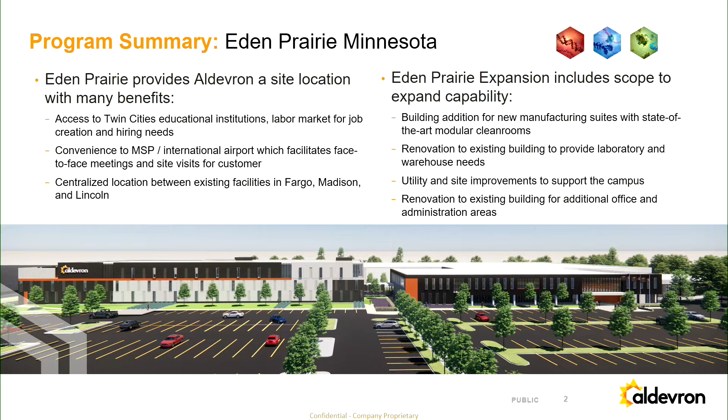With that, I will hand off to our architect, Jackie Peck, BWBR, St. Paul. I am Jackie Peck with BWBR, architect and project manager for this site.

So 7075 Flying Cloud Drive, as you mentioned, is the Blue Stem SuperValu building. It has been vacant for a couple years, so we're excited to get in there and start developing this property. It's an existing 345,000 square foot building, 2 stories, on a property that is zoned I2. The use of the building that we're proposing does meet the criteria of the I2 zone.

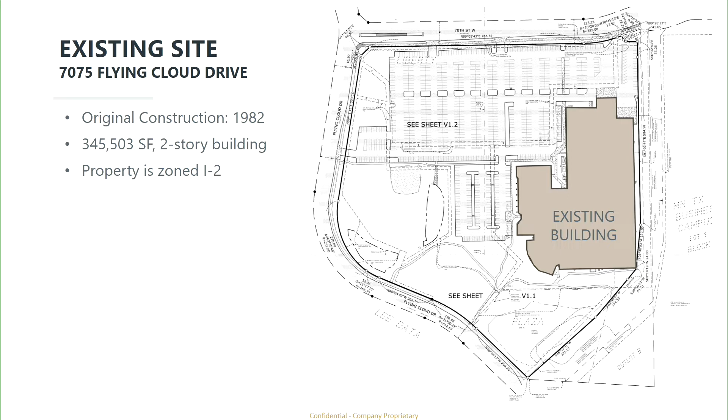As mentioned, we are proposing a 96,000 square foot addition to this building. It would be 2 stories and located in an impervious part of the site. There are minimal trees—it's mostly concrete and asphalt area where we're proposing this addition. The offset of any trees that we would be disturbing would be replaced in kind.

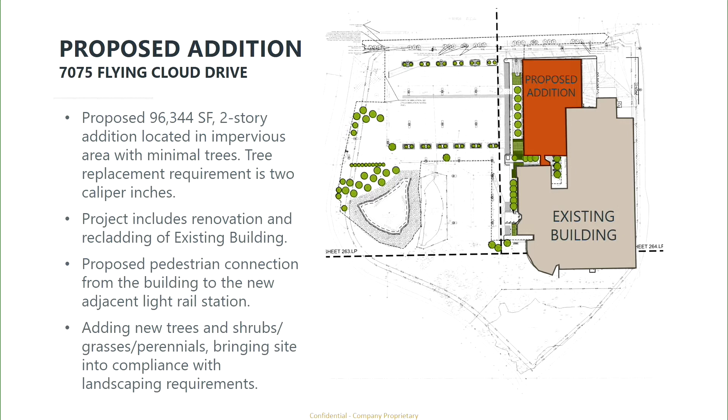With the addition, we would also be doing a renovation for portions of the existing building. Knowing that we have the Golden Triangle Station right at the corner, we have a pedestrian connection that we are planning to connect over there for staff to use. Otherwise, a few of the sustainability features we are planning to incorporate include EV charging stations, as well as low VOC materials, upgraded light fixtures, and LED dimming controls—trying to be energy efficient with everything new going into the building.

And then flying around to the back side, this is along the light rail. This is the existing precast building that we would be repainting in the branded colors.

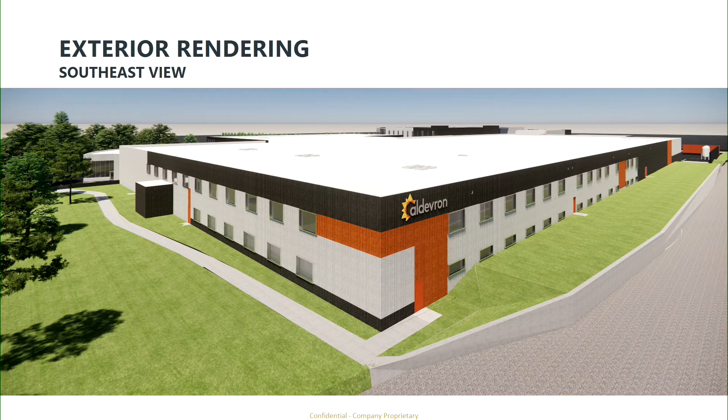There are 4 waivers that we are requesting with this project. The first one being parking. Per the city code, with the use moving into the building, we have 748 parking stalls required. We are providing 669 parking stalls, so we are requesting a waiver of a deficit of 79 parking stalls. With the traffic counts and anticipated employee counts for this building, we feel that the 669 parking stalls will accommodate those employees.

We're asking for a building height waiver. Maximum height in I-2 is 40 feet, and we are requesting 42 feet for the west facade only.

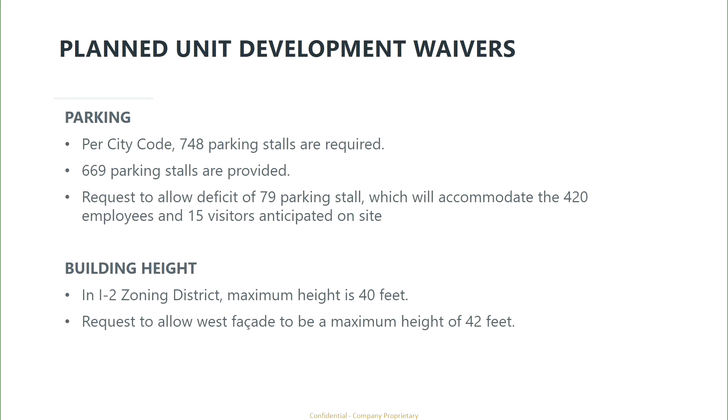We have a shoreland waiver. The city code requires 30% impervious surface area. The existing building is actually at 64.2%. We are improving that to 64.1%, so getting closer. And then materials, building materials.

I-2 zoning requires 75% class 1 material and 25% class 2 material. With the existing conditions of the site, the office portion of the building is deteriorating, so we do need to reskin that entire building. We're proposing more curtain wall and metal panel there.

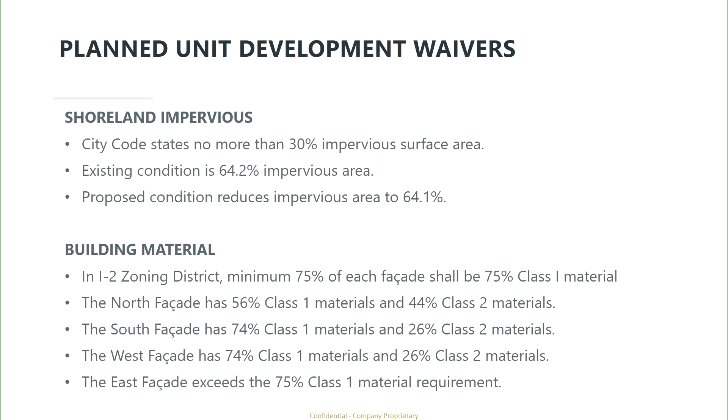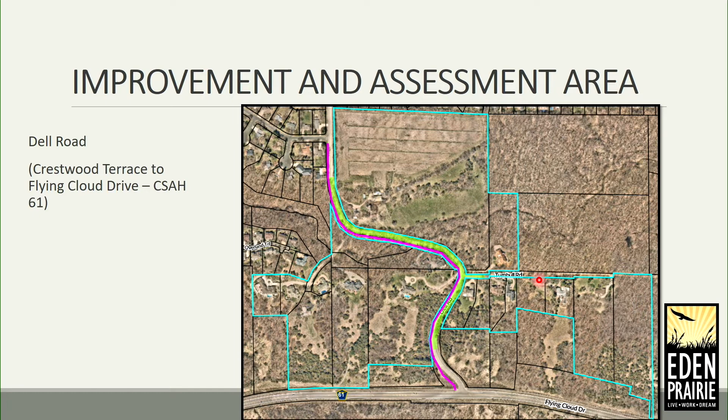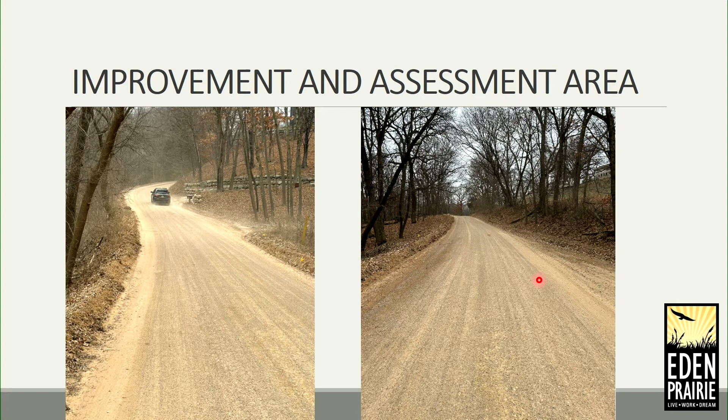As far as the feasibility report itself, I just wanted to highlight a few of these sections. It was completed in November of '23. The costs and analysis were done and aided by our consulting firm, WSB.

They provided some follow-up and backup information that we used in the report. So I'll walk through some street and trail information, the storm drainage, sanitary sewer and water pieces, and then of course the cost summary.

So with the street and trail, the proposal is to put a 32-foot roadway, which is our standard collector section. It's the same as what was done at Eden Prairie Road, and this is really the same exact cross-section of what is on Eden Prairie Road now and on Dell Road. This is just up the hill, the improved section of Dell Road, just before it turns into gravel, right before the park off in the distance. We've got the trail, an 8-foot trail section on the side, as well as the 32-foot road section shown there.

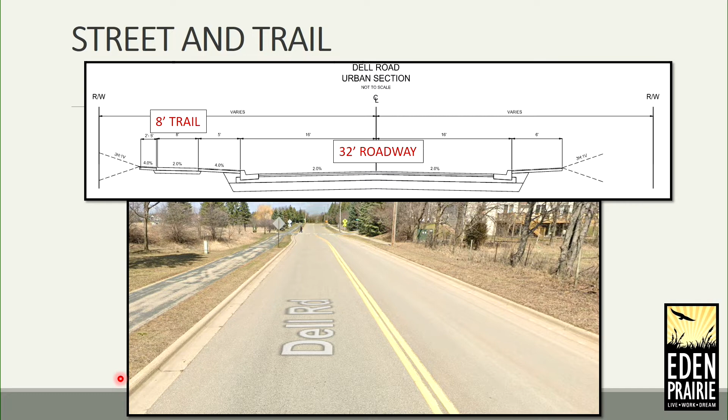Of course, retaining walls will be a part of this project. A couple examples are shown here in the picture. The one on Eden Prairie Road is the block wall with the railing on the left, and some of the different style walls are on County Road 61. We're envisioning we'd like to stick with one type of wall, but depending on construction methods, we may have different types, even different than this, just to essentially save some construction limits and try to keep the project within its limits as best as we can.

So that's the value of the walls, but just to construct them is a challenge as well. We're estimating, from a cost standpoint, about $2 million in retaining walls along this corridor, which probably 50% or more of the corridor will have a wall on one side or the other.

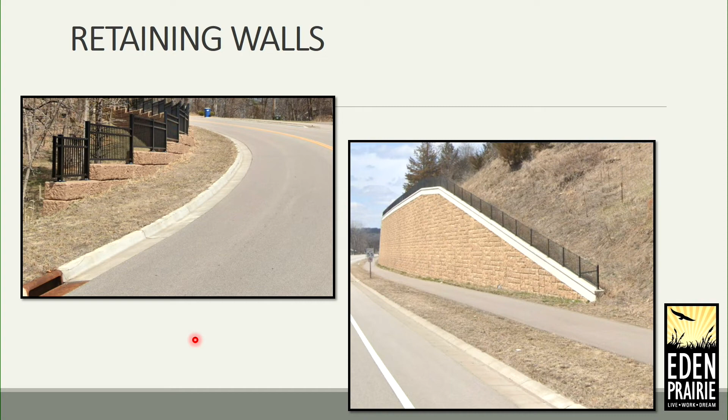From an existing utility standpoint, both public and private utilities are very sparse in this area. As you can see by this picture, it's a little hard to tell, but existing sanitary sewer is highlighted in green. We've got a stretch of sanitary sewer that comes down Dell Road and stops right by the farm property. We've got some sanitary sewer off to the west down by the Meadowcroft area, and then a couple of more recent installations of sanitary sewer over in the Reeder Ridge neighborhood.

Similarly, the water main utility is in the same spot as well. And then there's really no storm sewer except for a small piece next to the creek that runs through the project as well.

One of the goals of the project, in terms of water main, you can see it kind of stubbing down from Crestwood Terrace and then coming across where the Meadowcroft area is, there's a gap here. If you look at a bigger picture of this area from a water main standpoint, that gap actually creates a big dead end for this area. So one of the bigger benefits of this project will be to tie those two together and then extend water main down to this Turnbull intersection with hydrants through that area.

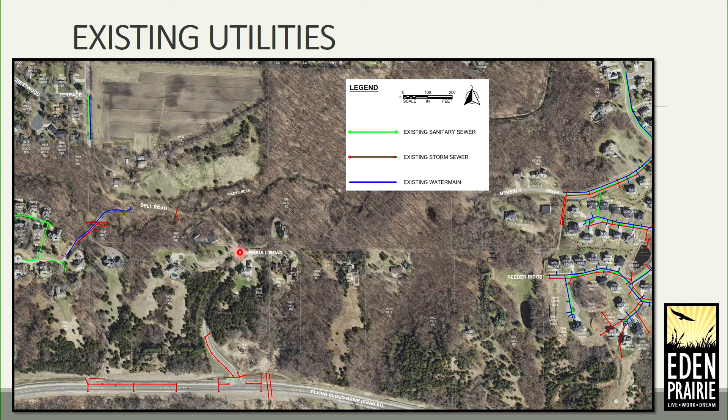So from a proposed standpoint, looking at storm drainage first, I know this is a little bit tricky of a graphic to pay attention to, but I wanted to highlight a few things. Obviously with a new paved road section and trail on one side, we've got to catch that water that right now just runs off the road, carries gravel down into the ditches, into the creek, creates some erosion. So with the new roadway installation, we build some storm sewer up, catch that water, treat it, and then send it into the creek, which is much better from an erosion control standpoint.

A big piece of this project would be replacing the culvert that's under Dell Road. This would be the city culvert replacement right in the middle. That would probably close the road during construction, and then we'd replace that on the bottom there. As you can see, Riley Creek runs through here; that's the public, city culvert. And then an item of note is this driveway for the Meadowcroft residents through here—it actually crosses another culvert that's privately owned.

As of this morning, that neighborhood has signed a petition asking for that culvert to be replaced with the city project. You may have noted from the feasibility study that we did analyze that and include some discussion on it in the report itself. Now with the petition asking for that to be folded into the project, we can work through that process to get it included as well.

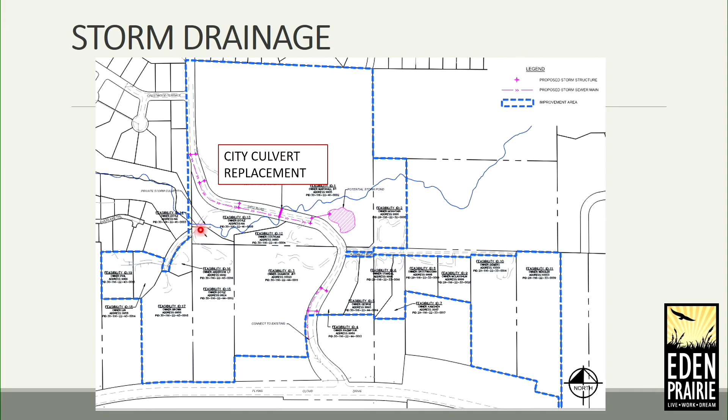So, sanitary and water—here's a large picture all the way across to those existing utilities that are on the east side.

I want to highlight that highlighted piece, that shape over there is all future work. That was part of our analysis trying to figure out the puzzle of how we serve folks in the future with sewer and water.

So the piece along Dell Road with water main and sanitary sewer is really what this Dell Road Improvements project is proposing. From a water main standpoint, we'd run the water main down, connect to the Meadowcroft piece that comes out from their neighborhood, and then run it down to the intersection of Turnbull.

From a sanitary standpoint, it's a little trickier. We had a couple of iterations, working through whether we do force main through this whole area, or the preferred option through the analysis was to run a gravity section from the Turnbull intersection down to a lift station that we'd land by the creek crossing.

That would get pumped up to the nearest manhole just south of Crestwood Terrace. So from a feasibility standpoint, this shows the most equitable option to have future development, both along Dell Road as well as Turnbull, get served by that sanitary service.

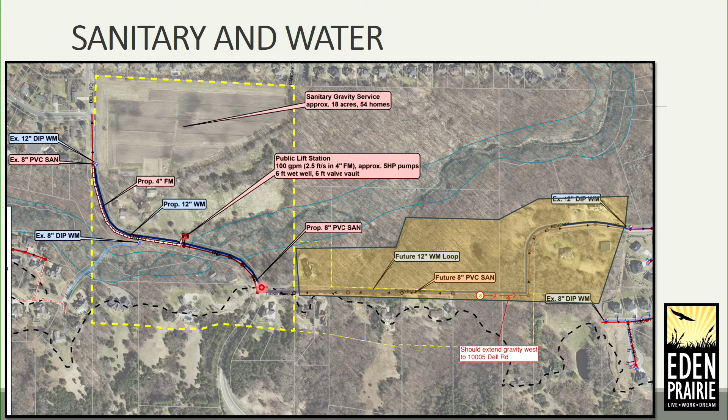So it's a little more cost up front from the city standpoint, and a little more long-term maintenance to own and maintain a lift station there, but it's no different than the lift station we added on Eden Prairie Road that served both Lions Tap and some of those neighbors as well. Similar situation there.

From a project cost standpoint, you can see the table here, right out of the feasibility study. Total project costs for the street are in the range of $5.6 million. Storm sewer and drainage, $1 million, and sewer and water about 1.7. A large portion of that is the lift station and some of the force main that goes along with it, for a total of $8.3 million.

So then I broke it out into city costs and project assessment costs. You'll notice there's no assessment cost for storm drainage or sewer and water. Sewer and water potential extra costs for a resident would be connection costs at the time of connection, so we're not proposing to assess that right now, because they would likely be connected when that's installed.

The 1.2 million of assessment costs shown on the bottom are really for street and trail. We were diligent in trying to figure out what piece of this road is most used and most beneficial to the residents there, and it's really that street and trail piece where the gravel used to be, or where the gravel is today.

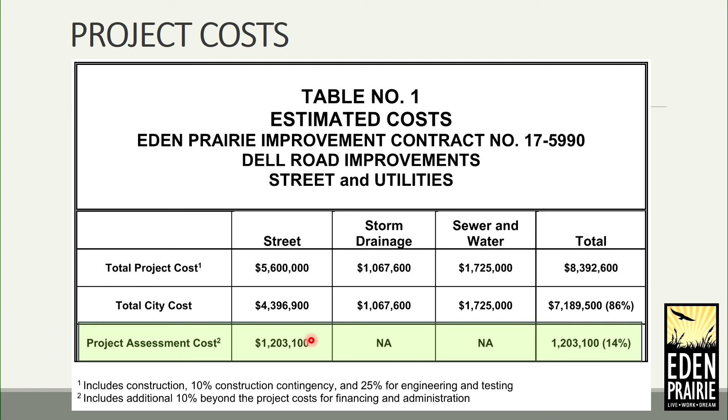These were based off of either potential development that was provided for us, so we based that off of a graphic that showed a 54 unit property or development on the Marshall farm. We also looked at other neighbors and developments that have happened in this area based on front footage and other geographic examples like that. That's where we came up with those potential units.

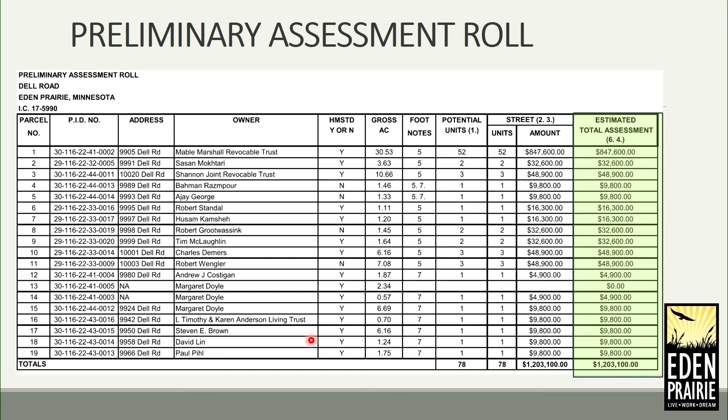Again, a homesteaded property that has development potential would get a one-unit assessment, and those additional development units would be deferred until the time of development. So they're shown in this assessment roll, but they're most likely going to be deferred.

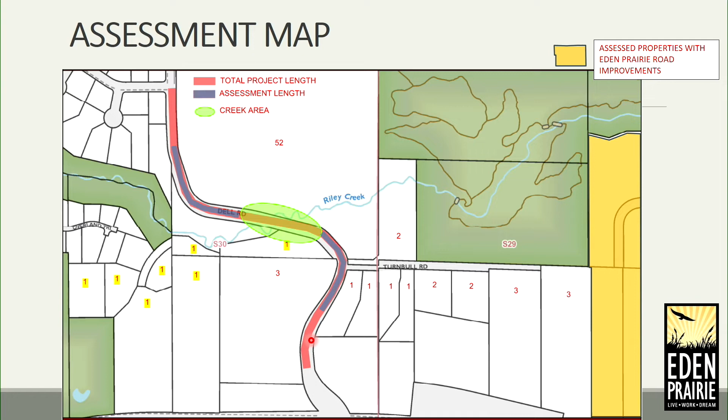So that's the walkthrough of the study. The requested action or next step would be to adopt the resolution ordering the improvements for Dell Road.

We've got a design consultant, WSB, that helped us with that. We would move forward with an agreement for final plans and specs with them that you would see and approve at a future council meeting, with the hopes that by fall of this year or early spring of 25, we would bid this project, start construction in the spring, finish construction or substantial completion by fall of 25, then wrap up anything needed in the summer of 26 with final completion, with a fall final assessment hearing in 2026, and residents would see that assessment show up on a spring 2027 tax statement.

With that, I know it was a lot of information, but I can stand for questions if you have any.

So council, this will be open up to the public hearing. Again, just like the last public hearing, we can do some comments and questions now and then, or preserve that for later, or do both. Do you want to ask some questions now? Especially if it's educational for people.

I've got one question, Councilmember Nelson. Does this go all the way down so it takes up all of the dirt or gravel road, or is there still a segment of it south of there? Mayor and council, there would be no more gravel road along this section.